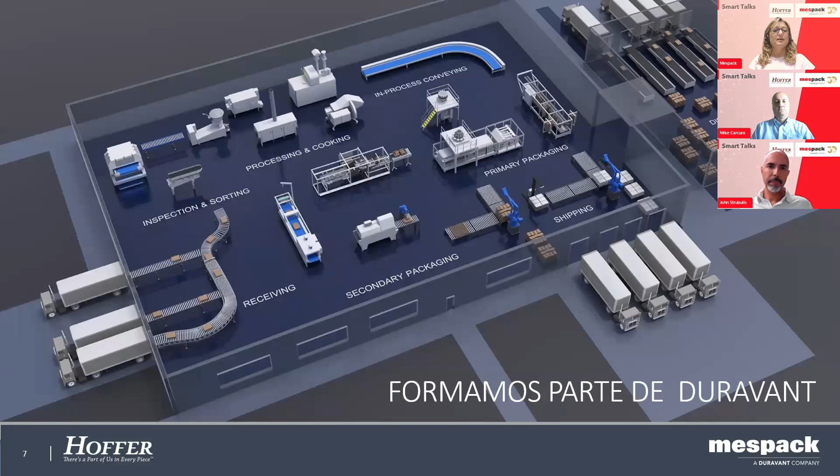Mespack, headquartered in Barcelona, is a global leader in flexible packaging and equipment for consumer packaged goods, and we are known for our innovation, creating sustainable packaging solutions. Mespack has been part of Duravant since 2015, a leading player in the world of industrial equipment headquartered in Illinois. Duravant is a global engineering equipment company with manufacturing, sales, and service facilities. Duravant offers immediate and lifelong aftermarket support across different sectors, such as serving food processing, packaging, and material handling industries worldwide through its diverse portfolio of operating companies and brands.

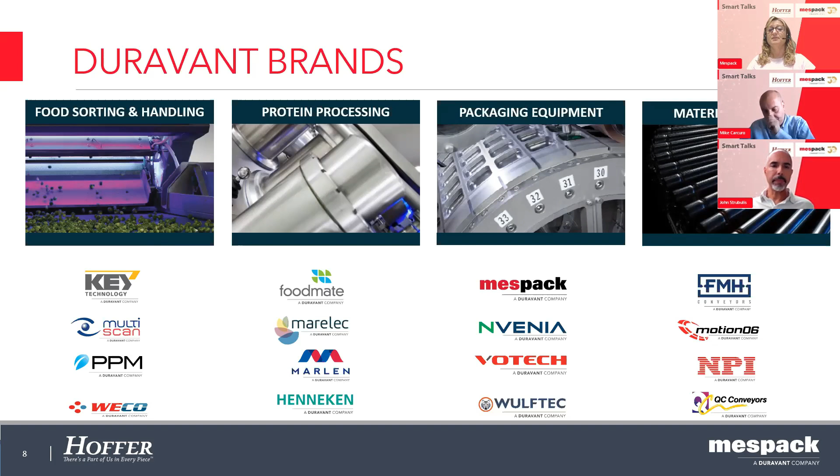Regarding Mespack, established in 1994 as a horizontal form, fill, and seal manufacturer, Mespack has evolved into a global one-stop shop with extensive services, with sales teams in over 90 countries and regional service centers, ensuring prompt access to parts. We boast the industry's largest product portfolio, with 380 employees across 17,700 square meters of facilities. Our production centers are in Spain, the US, and India.

Mespack provides solutions for various industries, including food, beverage, pet food, pharmaceuticals, personal care, and home care. Additionally, we serve industries such as lawn and garden, agriculture, tobacco, automotive, and more. Here you can see that we have the largest and most innovative portfolio. Our talented engineering team designs customized integrated solutions for primary, secondary packaging, and also end-of-line processes.

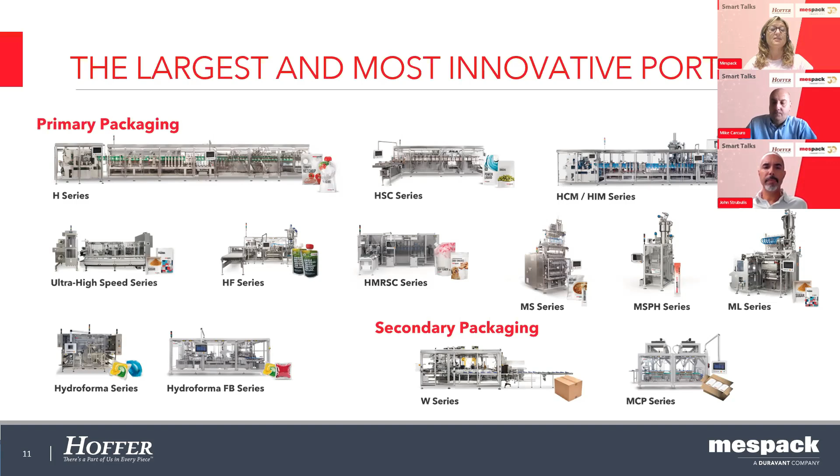With our extensive portfolio that you can see here in this slide, we offer high precision, efficient, and versatile horizontal form, fill, and seal machines for flexible packaging, including machinery for pre-made pouches and a wide range of vertical form, fill, and seal equipment. Additionally, we provide hydroform machines for water-soluble pods and end-of-line equipment to fit your secondary packaging needs, offering targeted solutions if required.

With nothing else to add, this is the beginning of our introduction to Mespack, providing you the opportunity to familiarize yourself with who we are. And now John, I'll pass you the floor.

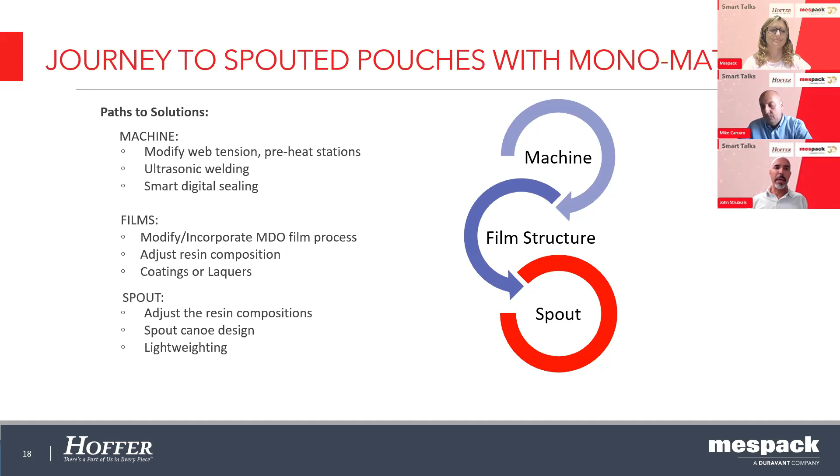Everyone is along on this journey, but there are different stages where everyone's at along the way.

So we talked a little bit about lightweighting. I think that's the low-hanging fruit we can look at—sustainability through weight reduction and spout redesign.

What we're really excited about here is we took one of our parts and were able to lightweight it from a very functional part, taking out 46% of the resin. We looked at the canoe shape as well, providing shallower ribs that helped along the process. This migration from a more functional part to a lighter weight, more versatile part lends itself more towards sealing with monomaterial films, and it's something we've been able to bring to market.

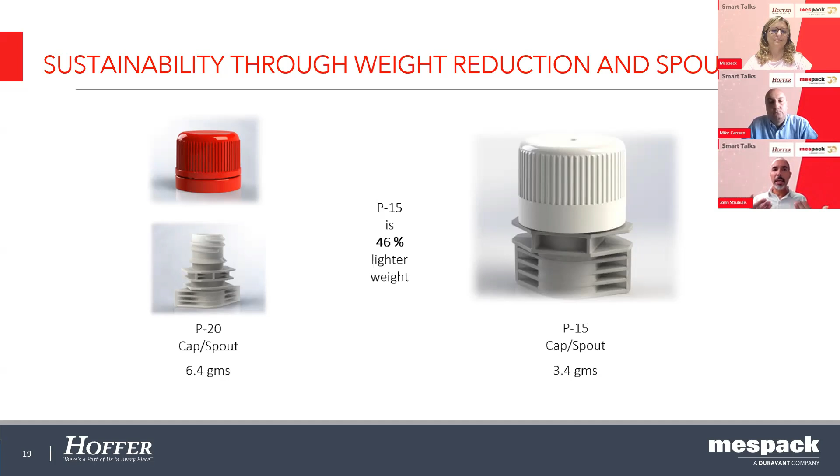Of course, when you look at the material standpoint, we've also been able to look at three different buckets: the recyclable ready materials, post-consumer and post-industrial resins, and last but not least, the biodegradable or compostable resins.

We've touched all three, but the way they are lined up on this screen reflects how much time and effort we're putting into each. We're really looking to find a solution with the recycle-ready materials, across multiple converters and multiple ways to get to a mono PE film.

Also with PCR and PIR—I'm really excited about PCR because here at Hoffer we have an FDA approved source for PCR that we can put into our product. We've processed it here and it works very well within our process, which can be challenging at times with different types of resins. We've been able to secure supply and have it process very well within the injection molding process.

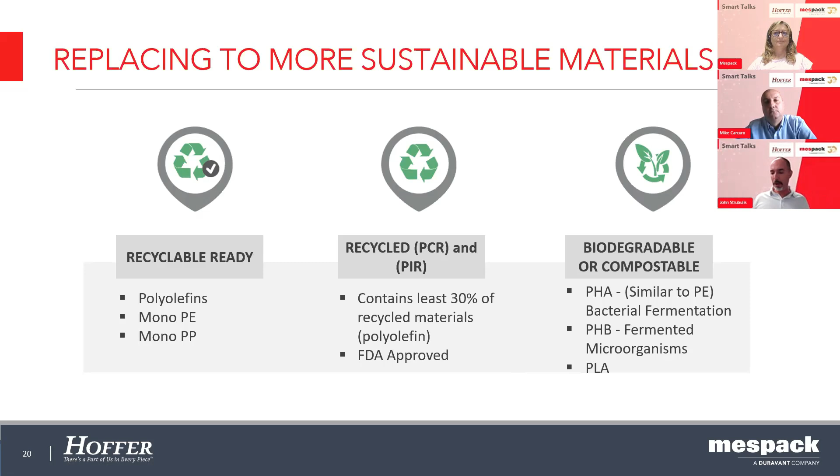So I'll share a journey here to spouted pouches with monomaterials. Some of the challenges we have, like all films, are variations with the mono PE structures. We receive requests from our partners and end customers about what films work with the spout.

Some films that we have work great—we don't have to change anything about our spout. They work well with the mono PE structure, and we're all happy campers.

But as the industry moves towards mono PE films in general, there's a need to incorporate all of our partners and converters in order to find a lower seal initiation, so that it can broaden film options to the consumer, manufacturer, and converters. One size does not fit all—collaboration is needed to actually get there.

So we've taken a couple of journeys with some of our film partners to get to a more sustainable solution. What we don't want to happen is this along the way: 'It's not my fault, we're looking at where's the solution.' I'll get a phone call saying, 'Hey, this spout doesn't work with this film,' and I think what we need to do is come together and figure out what we can control in order to make a finished product that works in the market.

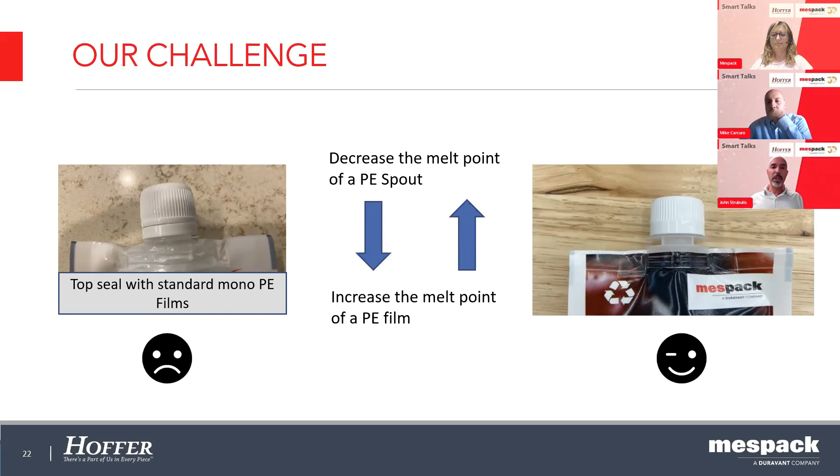What we want to get to is something more like the picture on the right. So we want to decrease the melt point of the PE spout by looking at different additives, by looking at different resin blends, and then from the film side, increase the melt of the PE so that we can find a way for that package to actually seal and look the way traditional films look aesthetically.

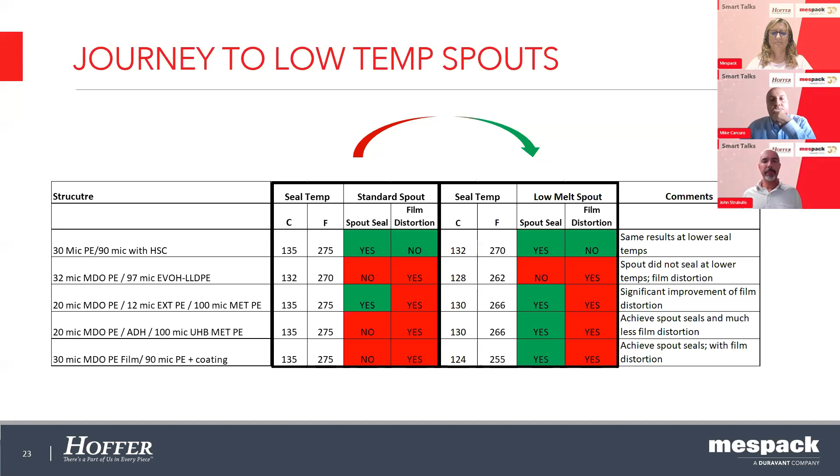So part of the journey is collaborating with the partners. We have invested, Mespack and Hoffer have invested with Dow at the Dowpac Studios location to actually bring these partners together. So in doing that, I'll just bring an example to kind of see how this journey went with one of our partners here.

So this is a typical, let me just...

So observations with one of our converting partners, observations with a standard resin blend. This is our typical blend. They sent in a film, they trialed it.

When we look at these different topics and headers, station 1 is the triple point seal. Station 2 is right here, where the spout seals - that's what we're interested in. And then also the bar seal on top, the horizontal seal temperature.

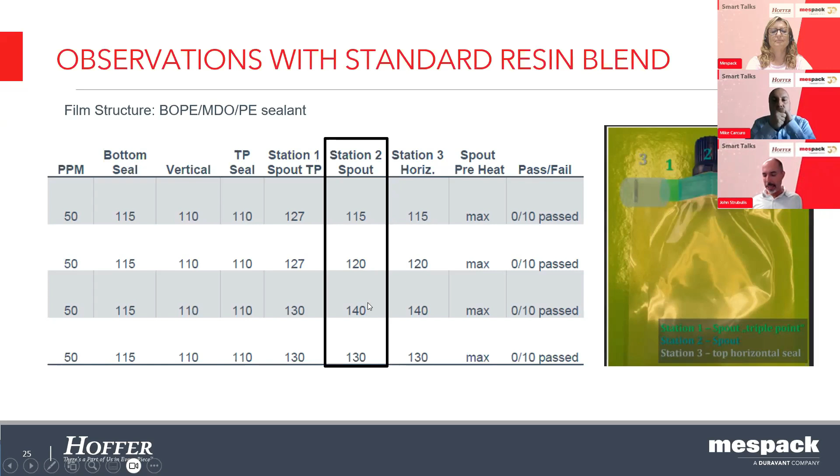With the first variable that came in, we didn't get any pass fail when we put it in the hog testing. We went up to 100, started at 115, went up to 140. We didn't see any passing variables.

So we then moved to a new film variable coming in. We kept the structure the same, everything was the same, but a new film structure was introduced. Now that we had the triple point seal temperature isolated and the top horizontal seal isolated, we went up to 100, started at 120, went up to 130.

And what we saw was hermeticity. We saw in the hog test passing results once we got to this sweet spot. What we didn't anticipate is that we passed hog testing at 6.5 psi.

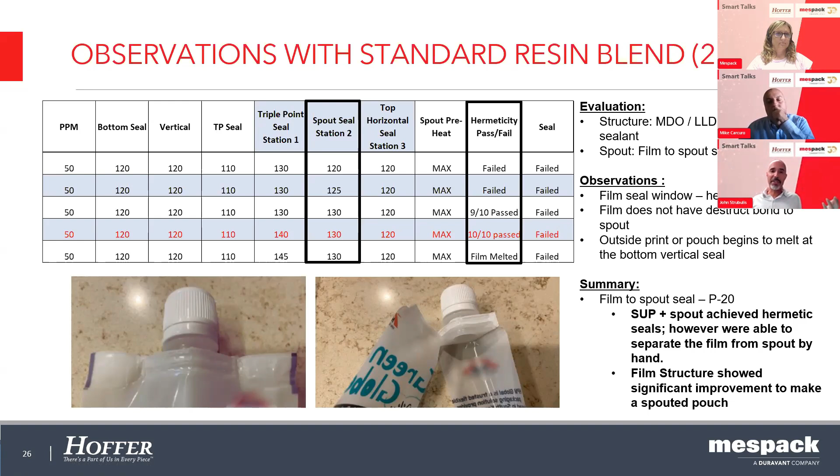However, we were still able to pull out that spout. So we did not have destruct bonds - it's not something we wanted to see. Even though we passed testing, we failed because the spout came out, which was a learning for us.

125 degrees and 130 degrees. We still passed hermeticity, but we were still able to pull out the spout, so we didn't have great adhesion.

However, within that failure mode, there were improvements. There was less film distortion, and there were improved bonds. This shows that the preheat station is working, and the low melt spout is working as well.

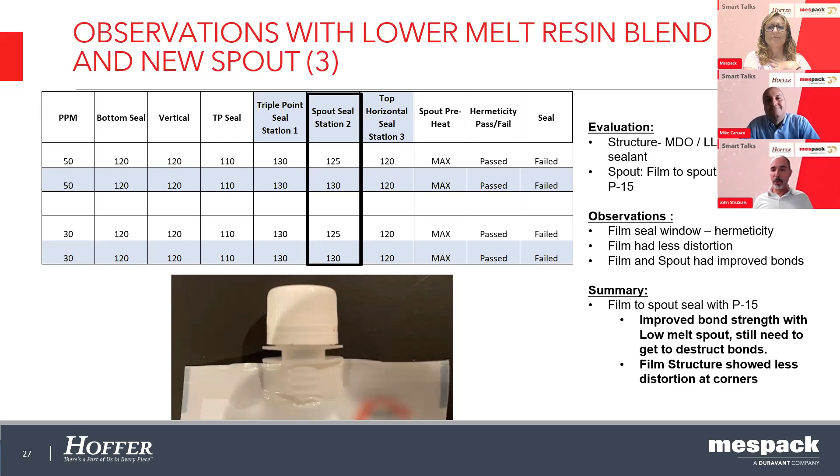So in summary, what we're trying to do now is go from boosting the melt temperature of the structure, and in our last step, we're going to try to decrease and bring down to the low 120s the melt temperature of the spout.

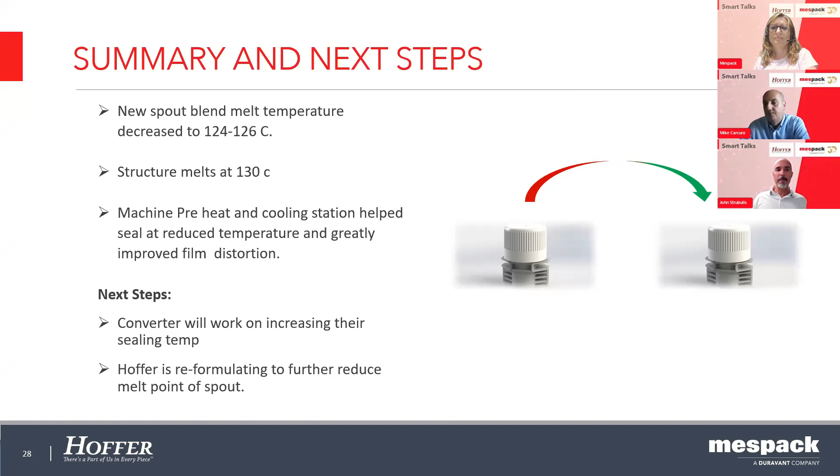One of the ways, once we went through this process, one of the ways to do that is to look at the different resin blends, and Dow was very helpful making recommendations. I look forward to processing these.

We're actually going to be running these products here shortly, and then we're going to be running another trial. Hopefully when we come together next time, we'll be sharing a success story of having a finished pouch with a film and a spout that have worked together for about a year, ready to go in the market.

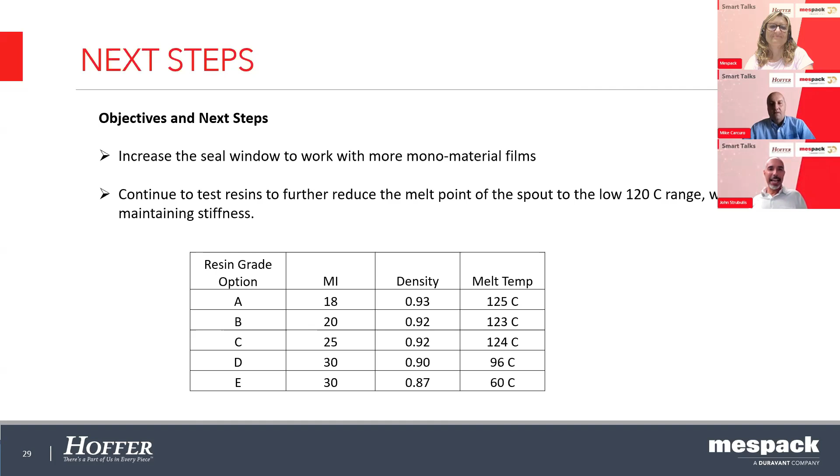So we had such a great time doing it. We actually took a video, brought it along the way during our last trial, and we're going to share a little bit of our journey there.

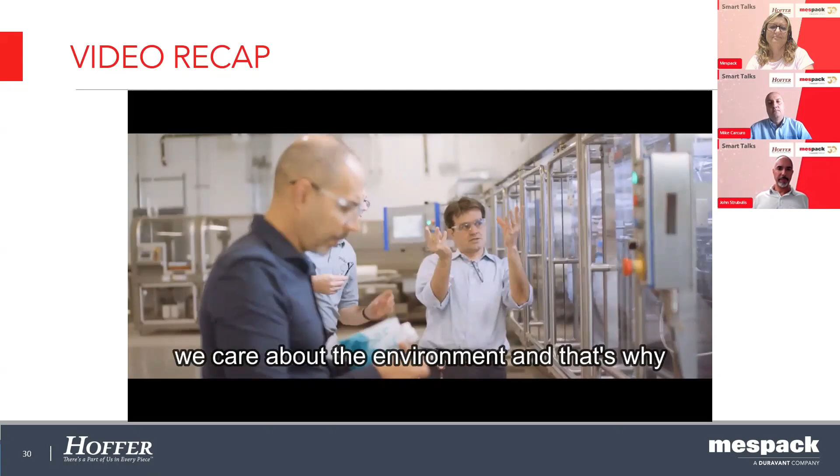As the industry is moving for a more sustainable solution with monomaterials, there's a need for this collaboration, and it's really driven by the customer. As a consumer, we care about the environment, and that's why when we think about packaging, we want to have a package that can be reused, recycled.

When we looked in market and saw the new requirements, we worked together to find the correct solutions for the market. When we sit together and discuss the challenges, each of us starts to bring solutions for their specific area. In our case, we're bringing new resins.

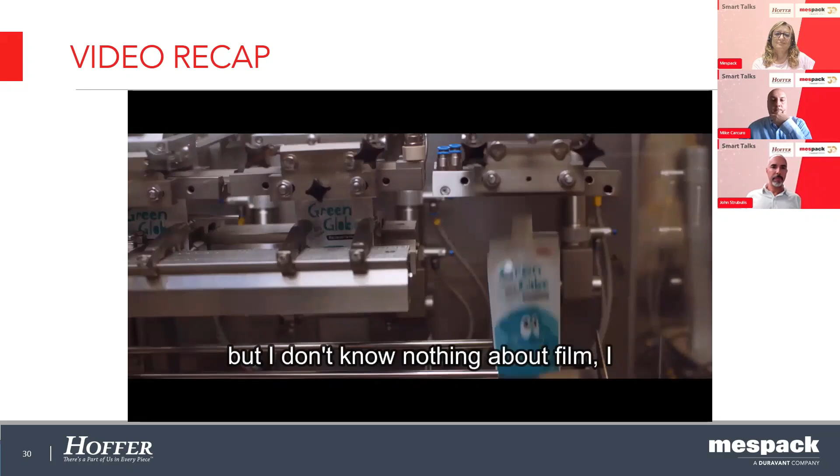First, you need to deliver the performance that is required. You need to make sure those packages run at a desirable speed. I know how to make machines, but I don't know nothing about film, I don't know nothing about caps. Every time that we make all these tests, we learn more and we can give better solutions to them.

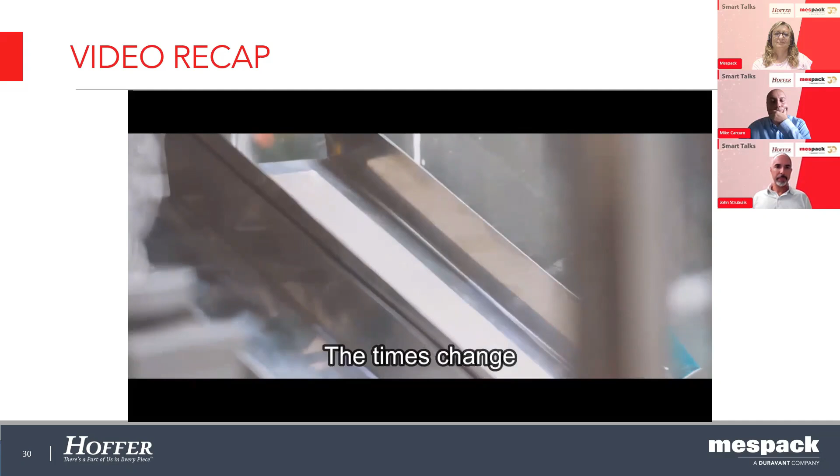The times change, and the requirements that the governments have around the world change too. We need to be the first ones that have all the solutions for all our customers. We've got to continue to develop these films because the demand is there, and that's the movement of the industry, our whole value chain.

So the industry has been working already several years to be able to deliver on more sustainable and circular packaging. People who've been in the market for a long time understand it takes time to do that kind of innovation, but if people are thinking about it and have goals towards it for the long term, that's when really good things can happen.

So that was part of the journey, and I just want to say we had a ball doing the video and we had a ball doing the trial. And thank you all for your time.

Thank you, John. Very good job. Thanks for your clear presentation. I think the video you just showed us is a clear indication of how important the synergy is, the cooperation between the machine supplier, manufacturing, the film supplier, the cap and spout supplier, and of course the customer. Thank you, John, very well done.

So my goal now is to give you some information about what Mespack is doing in order to make it possible to work with new machines and even with existing machines using fully recyclable or sustainable material.

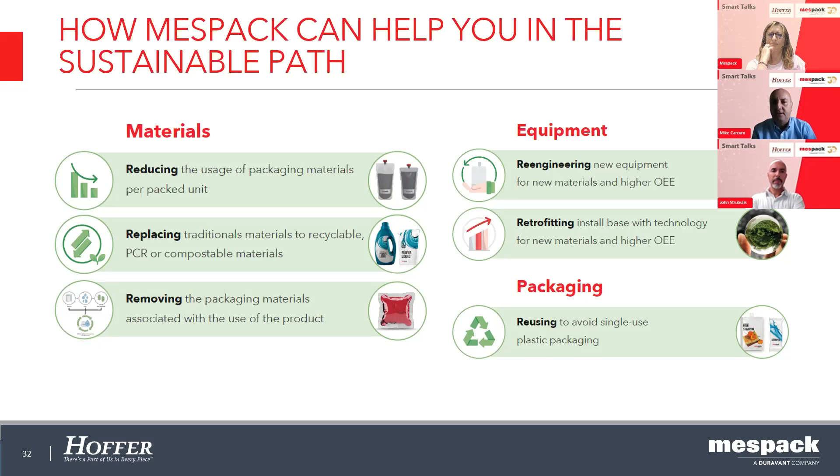This is basically the challenge we are facing, not only as Mespack but as a packaging machine industry in general. What is easy to work on our machines is not eco-friendly, and what is eco-friendly presents all the time several challenges on our machines.

We know legislation in Europe, but actually even in the US, in Asia, in the rest of the world, the world is moving in that direction. Monomaterial is going to be the future, and it's important to be ready to face this important change in the market.

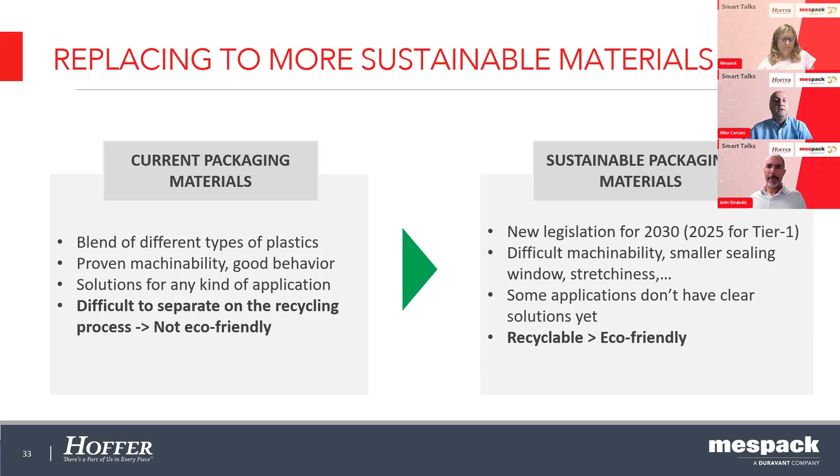So now the question is, what did Mespack do in order to be able to work on our HFFS technology with monomaterial? Basically, we are considering three different phases.

The first is to be able to modify, arrange, and set our sealing station in order to use sustainable material. Let's see some examples of that.

The second phase, which was also an important improvement on our side, is to reduce the changeover time, making it easier to reduce material waste during the format change right after the format is changed. That was a very important topic for us because the scrap rate percentage was very high in the past.

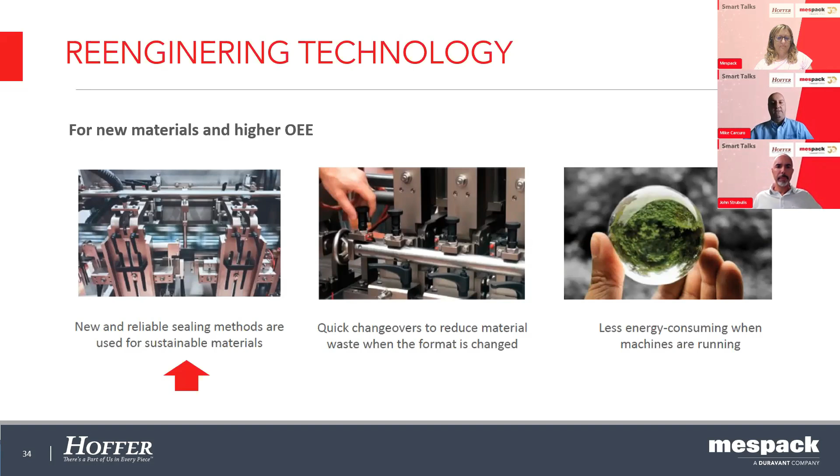And of course, one of the goals is also to reduce our energy consumption, which is always a challenge, but using new units and modern technology helps us reduce consumption on our machines as well. Now let me summarize some of the improvements we made.

The first is Elmedur sealing bars. We know that monomaterial presents a huge challenge in terms of sealability. With standard material, the sealing window is plus or minus 20 degrees Celsius. For fully recycled material, it's plus or minus 5 degrees Celsius, more or less. So the tolerance in terms of heating setting is much more relevant. The Elmedur material allows heat to be homogeneously spread on the sealing bar, with a tolerance of plus or minus 3 Celsius, which is quite remarkable.

Also important is double bottom sealing. You all know probably better than us how challenging the bottom sealing is when we have what we call the triple point, three layers of material to be sealed in a very short time. Doubling the sealing station helps reduce temperature and pressure, causes less stress for the material, and increases the sealability of the material.

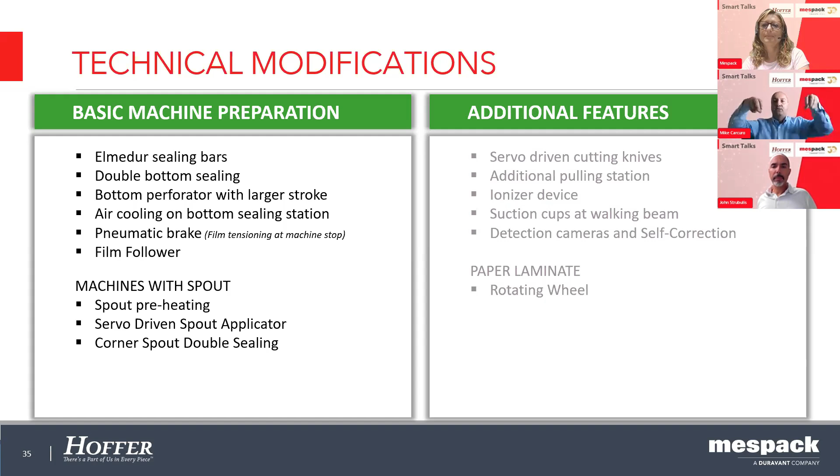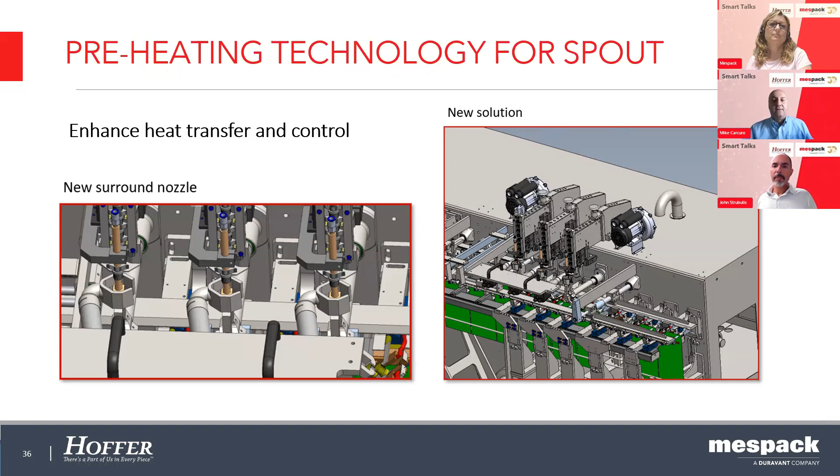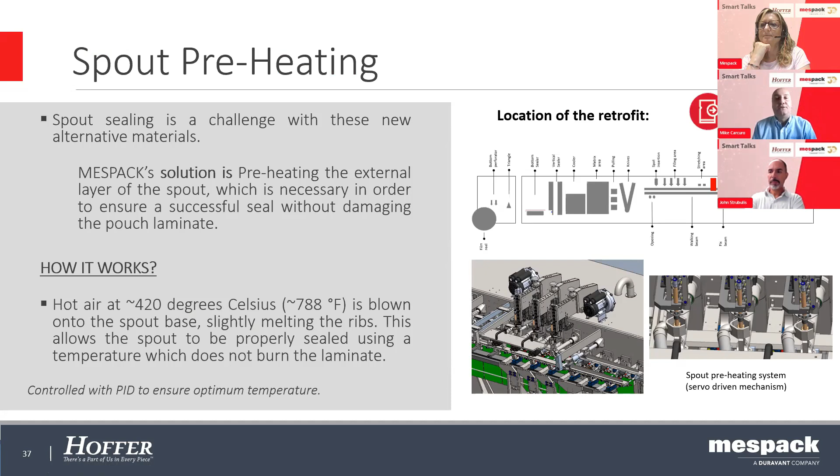Let's see now very quickly the preheating technology for spout. We basically preheat the surround of the spout, and we keep the heat around the spout to avoid it spreading inside the machine. We apply hot air at 420 degrees Celsius, which helps melt down the ribs of the spout. After that, when the pouch is below the station, we apply the spout inside the pouch while it's already preheated, which helps a lot to reduce the sealing time and the external temperature we apply on the sealing jaw.

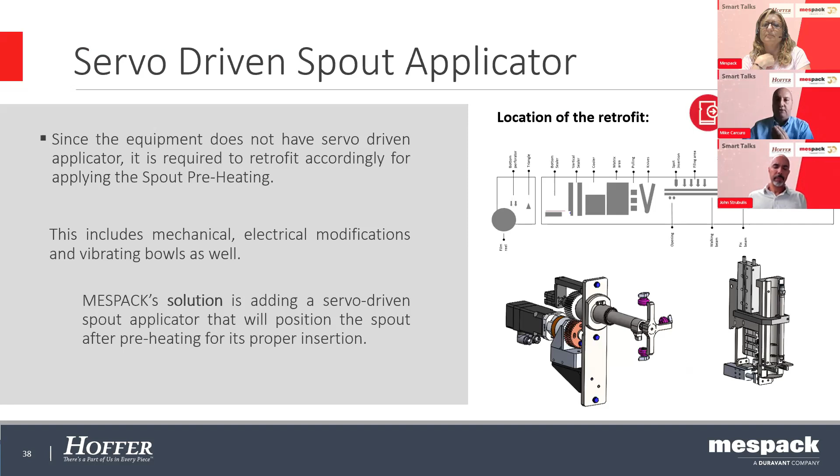Servo-driven spout applicator. This is important also when considering the retrofit possibility for our machines. Basically, it's a servo-driven applicator that helps to have better control of the position of the spout, but also the timing during transportation, application, and sealing of the spout, which is fully independent. That's also important.

Same story for the corner spout double sealing point. For the corner spout, this is very challenging - it's important to avoid deforming the material. For that reason, we have two sealing stations: the first one where we apply and seal the spout, and the second one where we make the final sealing on the spout. Having the double sealing point helps reduce the temperature and increase the timing for the sealing as well.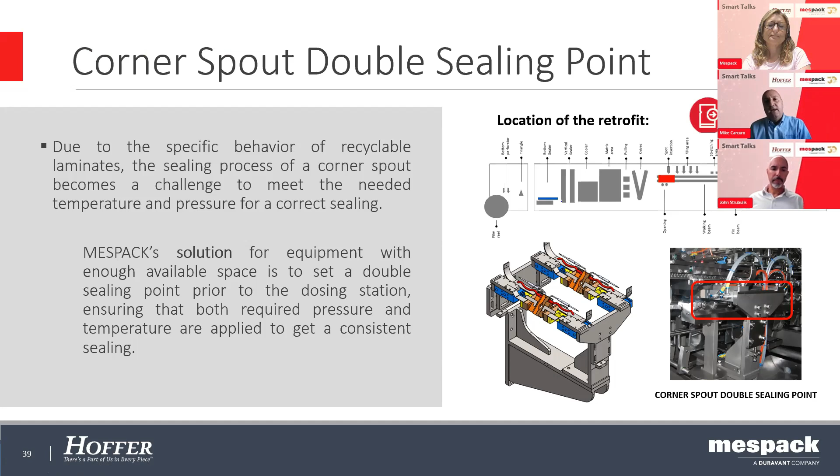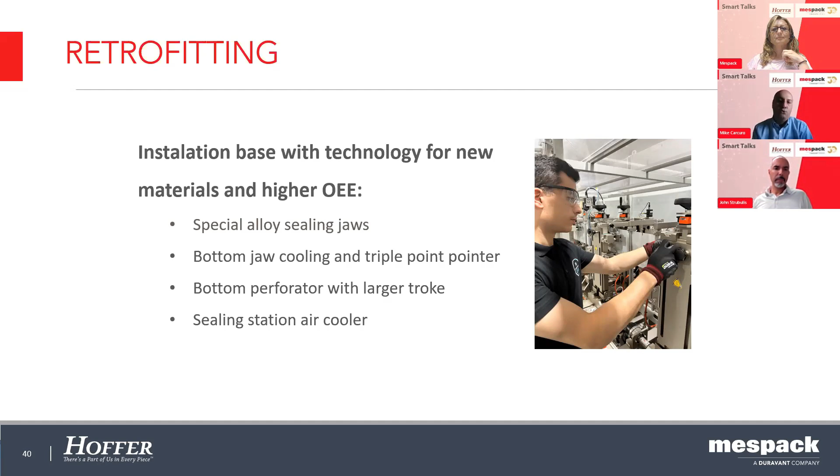Let me mention finally about the retrofit. Our existing customers are very important for us, so we don't want to say if you want to work with mono material, fully recycled material, you need to buy new machines - that's our dream, but it doesn't work that way. We want to help our existing customers make a retrofit to increase the OEE of the machine, as well as be able to work with mono material. We can basically replace the sealing jaws, the bottom jaw, the bottom perforator, and the sealing station air cooling, so the old machines could be set up pretty much like the new ones. I'm not saying this is a cheap retrofit - I like to be honest with you - but it is feasible. It's important to consider that you can set your existing machines to work with mono material.

Finally, there's no need to say how important the spouted pouch market is in the US, and not only in the US, worldwide actually. For different applications: home care, personal care, baby food, beverage in general. We see a huge increase in demand for this kind of product, and our data, our intelligence, shows us that there is a lot of room for improvement to ramp up the market worldwide.